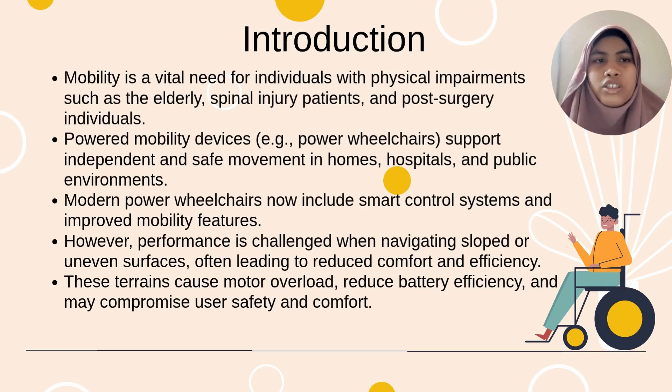Today we will be presenting an analysis on the performance of power wheelchair on inclined surfaces. Mobility is a fundamental need, especially for individuals with physical impairment, such as the elderly, patients with spinal cord injury, or those recovering from surgery. Power wheelchairs play a critical role in providing safe, stable, and independent transportation, whether at home, in hospital, or in public spaces. While modern design includes smart controls and improved mobility features, one of the key challenges still remains navigating slope or uneven surfaces. Such terrain places extra demand on the wheelchair motor, affecting both comfort and system performance.

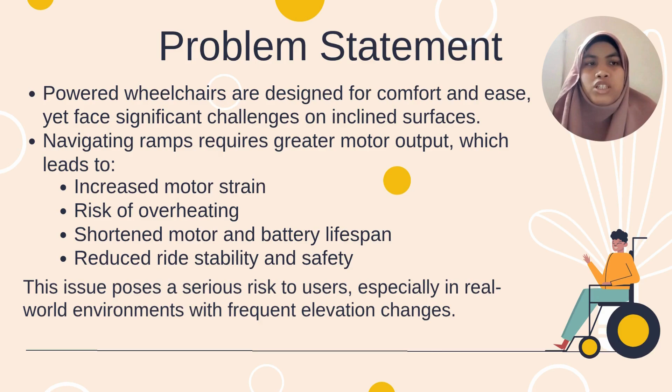Now, let's go into the core problem. Although power wheelchairs are built for comfort and efficiency, they tend to struggle significantly on ramp or inclined path. When climbing or descending slope, the motor is forced to output more power. This not only leads to motor strain and increased energy consumption, but also causes faster battery drain, possible overheating, and a general reduction in the lifespan of the system. In addition, users may experience jerky movement or instability, which can pose serious safety risks. Because this issue is so common in real-world environments, we believe it's critical to study and address this limitation.

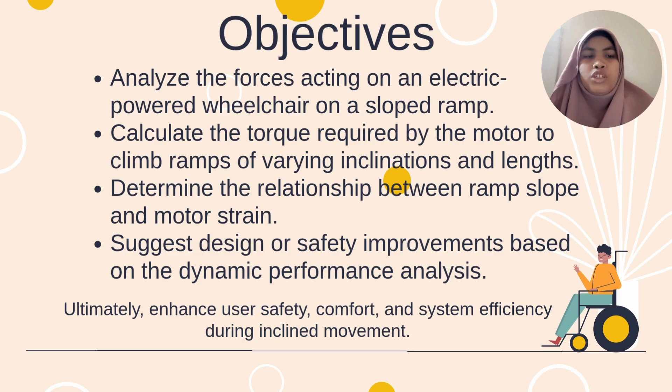With that in mind, here are the objectives of our study. First, we aim to analyze the forces acting on a power wheelchair as it moves on slope ramp. Next, we will calculate the torque required by the motor at different angles and ramp inclines. We also want to understand the relationship between slope and motor strain, as this can inform us about the mechanical limits and design gaps. From this analysis, we hope to propose improvements or safety measures to enhance user experience. Ultimately, our goal is to contribute to the development of power wheelchairs that are more efficient, durable, and safe for inclined travel.

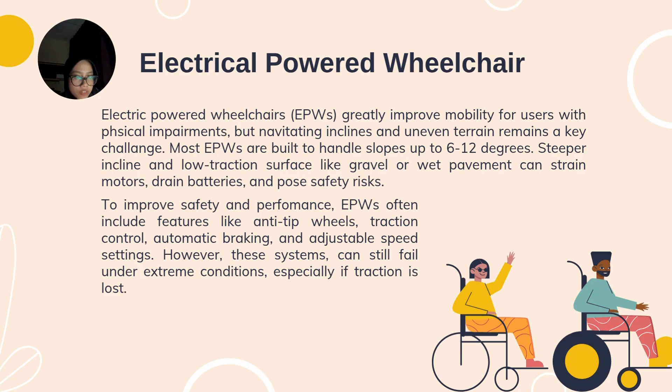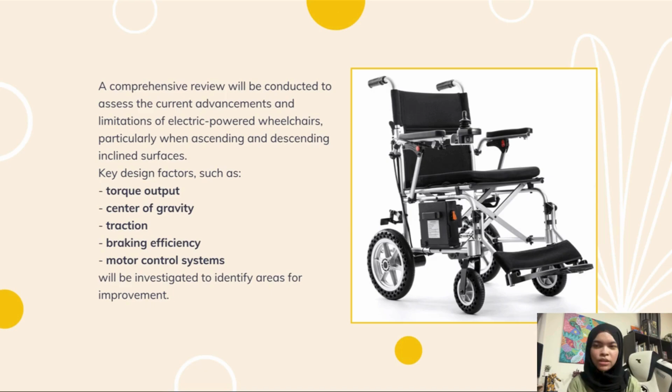I will be presenting a comprehensive review of the advancements and limitations of electric powered wheelchairs, with a special focus on their performance when navigating inclined surfaces. Our goal is to highlight key design factors including torque output, center of gravity, traction, braking efficiency, and motor control systems to identify areas for improvement. First, we start with forces in equilibrium.

When the wheelchair is stationary on a ramp, the gravitational component pulls it downslope. We analyze how this is balanced by the normal force and friction to ensure the wheelchair remains stable without unwanted rolling. Second, torque and rotational dynamics are critical.

We examine whether the motors can generate enough torque to climb inclines safely without overloading or causing sudden jerks that may destabilize the user. Next, the center of mass and stability analysis looks at how seat position and incline angle affect tipping risk. By adjusting the seat's position, we can optimize the center of gravity for maximum balance during both ascent and descent.

Fourth, we analyze load distribution and reaction forces on the front and rear wheels. This ensures the loads are balanced to prevent backward tipping when going uphill or nose diving forward when going downhill.

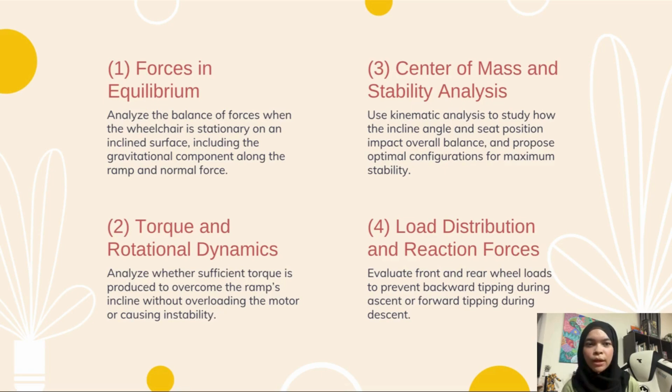Friction and traction are equally vital. We calculate the required coefficient of friction to maintain grip on different surfaces, especially when they are smooth or wet, to avoid dangerous slippage.

Braking dynamics and deceleration come next. We use dynamic principles to evaluate braking torque, stopping distance, and the risk of skidding or forward tipping during sudden stops on slopes. The moment of inertia and wheel acceleration are also considered.

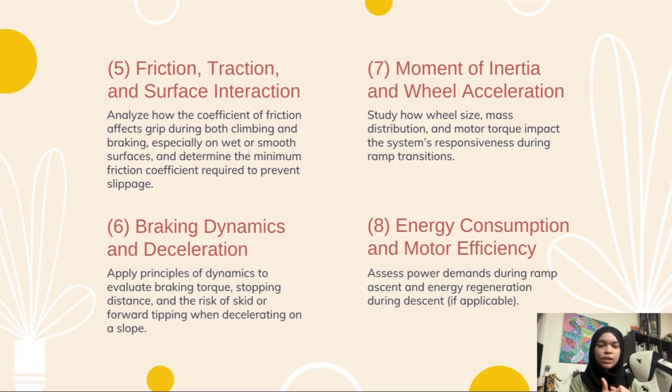We look at how wheel size and mass distribution impact how smoothly and safely the wheelchair can accelerate or decelerate during ramp transitions. Lastly, we assess energy consumption and motor efficiency, calculating the power needed to climb inclines and exploring whether energy can be regenerated during descent to extend battery life.

Okay, so now we will discuss the results or the calculations that we did based on the concepts that I discussed earlier during the methodology slide.

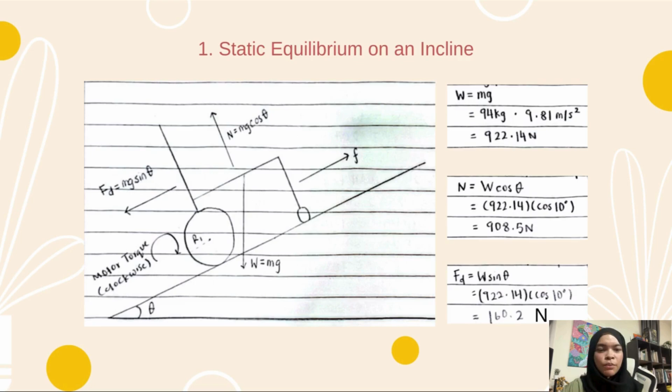First, we will discuss the calculation of static equilibrium on an incline. As you can see, I drew a free body diagram. Let's look at the forces when the wheelchair is stationary on a ramp. Imagine the wheelchair on a 10-degree incline. Gravity pulls it downward with a force of approximately 922 newtons. This force splits into two parts: a normal force of approximately 908.5 newtons pressing the wheelchair into the ramp, and a downhill force of approximately 160 newtons trying to make it slide down.

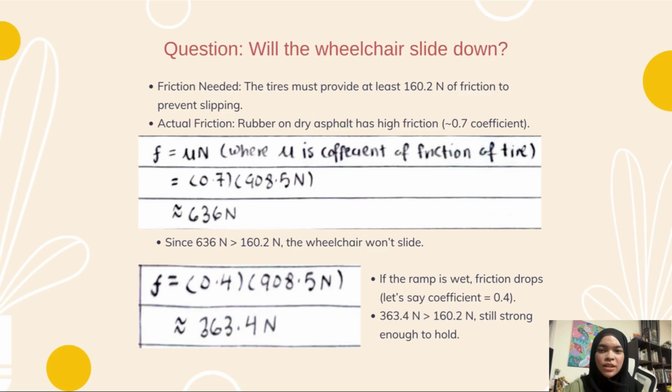So the question is, will it slide down? The rubber tires on dry asphalt provide up to 636 newtons of friction. Since we only need 160 newtons to hold the wheelchair, it stays put. But warning, on wet ramps the friction drops to 363 newtons, which is still safe for 10 degrees, but steeper ramps could be risky.

Now I will talk about the torque requirements for ascent, or the torque needed for the wheelchair to climb. For a 10-degree ramp, the downhill force is 160 newtons, and to accelerate at 0.5 meter per second squared, we need an extra 47 newtons. So the total force we need is 207 newtons.

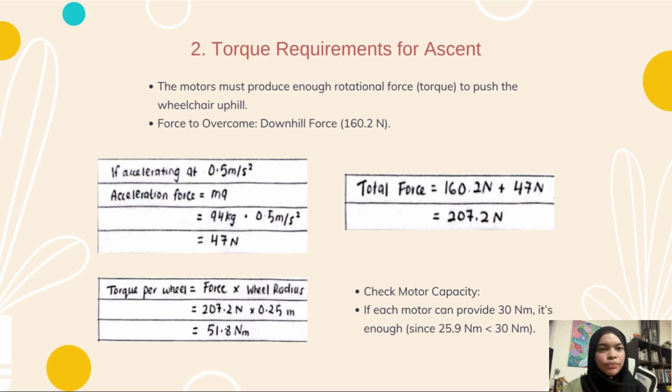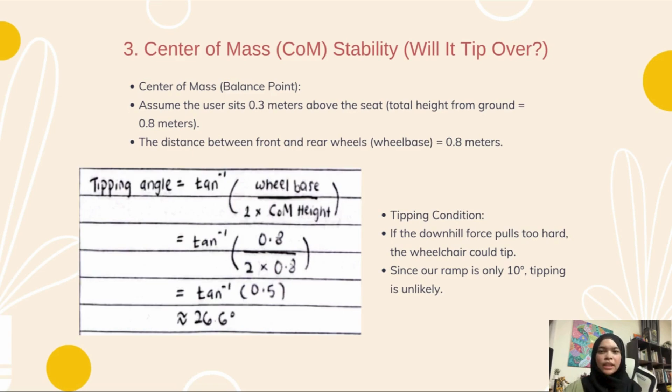Next, we will talk about stability, or the center of mass. Will the wheelchair tip over? That depends on the center of mass. Assuming the user's weight is centered 0.8 meters above the ground, the tipping angle is 26.6 degrees, far beyond our 10-degree ramp. So now, braking on descent.

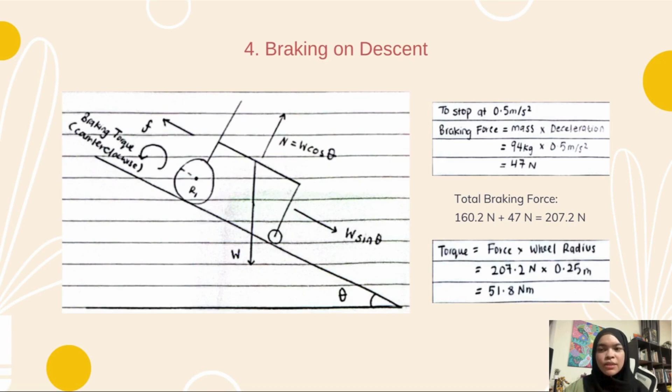Going downhill, brakes must counteract gravity. For a safe descent at 0.5 meter per second squared, with the downhill force of 160 newtons, the braking force might be 47 newtons, so the total braking needed must be 207 newtons. This requires 51.8 newton meters of braking torque. If the brakes can't deliver this, the wheelchair could speed up uncontrollably or tip forward.

Now the traction and friction limits. The minimum coefficient of friction to prevent slip is 0.18. Since our tires are made of rubber, we have a coefficient of 0.7, which is sufficient. But in wet conditions, that coefficient may drop down to 0.4, which is still safe for a 10-degree ramp.

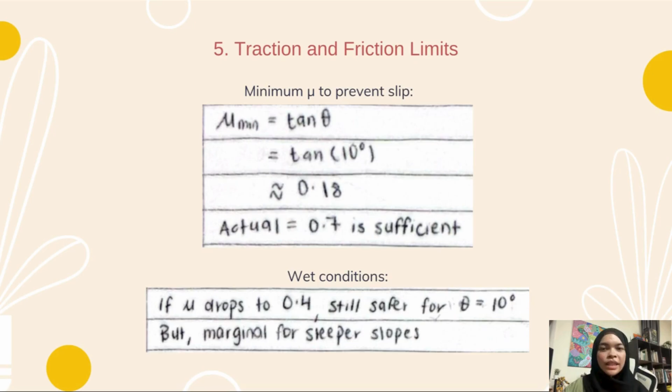So now the energy and battery life. Climbing ramps drains the battery fast at 207 watts of power. A 240 watt-hour battery like the EW6's lasts just 70 minutes of continuous climbing, based on my calculations.

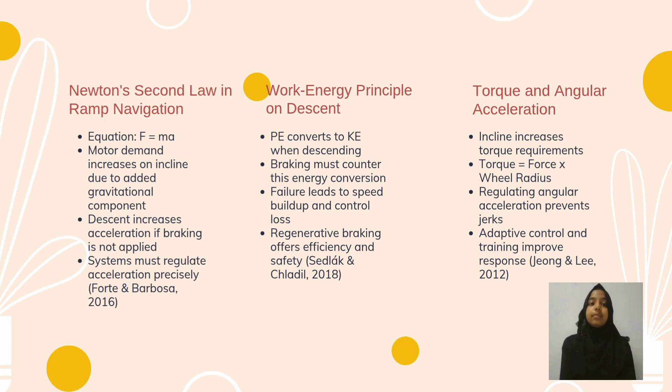Let's also look at momentum and impulse in braking. When descending, momentum increases. To stop safely, braking force must be applied over time to avoid skidding. Users with good core strength help absorb this force, but otherwise the braking system carries the full load.

We also have dynamic stability and equilibrium. Staying balanced while moving uphill or downhill requires maintaining dynamic equilibrium. A high center of gravity increases tipping risk. Features like anti-rollback wheels and adjustable seats can help stabilize the system.

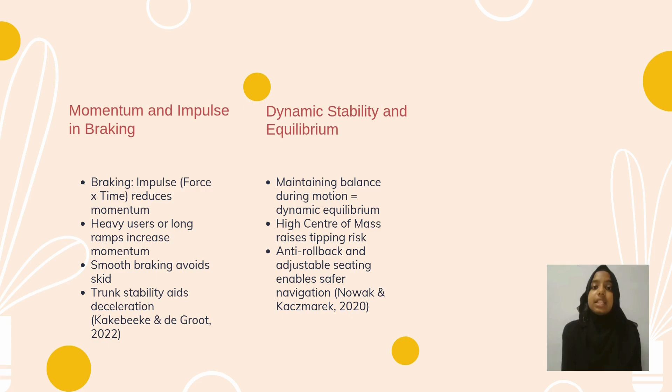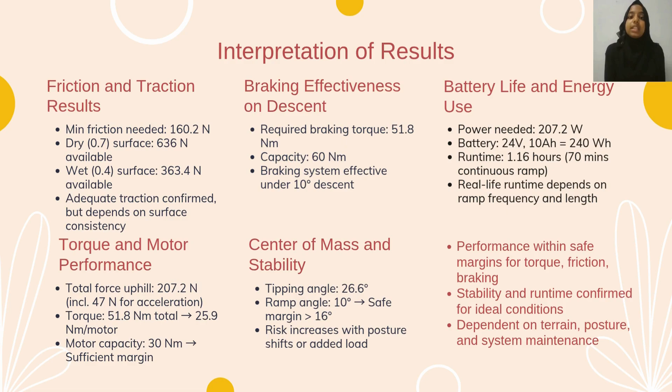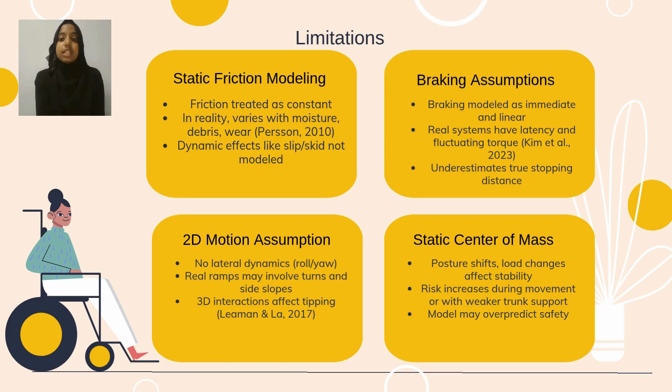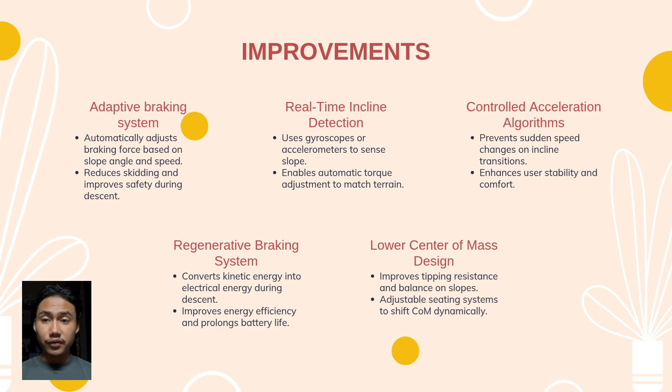So now, to ensure safer and more efficient powered wheelchair navigation on ramps, several key improvements can be made. First and foremost, the adoption of adaptive braking systems is crucial. These systems can automatically adjust the braking force based on slope, angle, and speed, reducing the risk of skidding and ensuring smooth deceleration during descents.

Next, we suggest implementing real-time incline detection using sensors like gyroscopes and accelerometers. This allows the motor to instantly adjust the torque output based on the slope, improving performance and safety on changing terrain. We also propose controlled acceleration algorithms that prevent abrupt speed surges during ramp transitions, which minimize tipping risk and enhance user comfort, especially for elderly users.

Next, in terms of energy efficiency, regenerative braking should be introduced. These systems capture kinetic energy during descent and convert it into usable electricity, extending battery life and reducing motor strain. And lastly, for structural design, a lower center of mass should be prioritized. Adjustable seat systems can dynamically shift the user's center of gravity to prevent tipping.

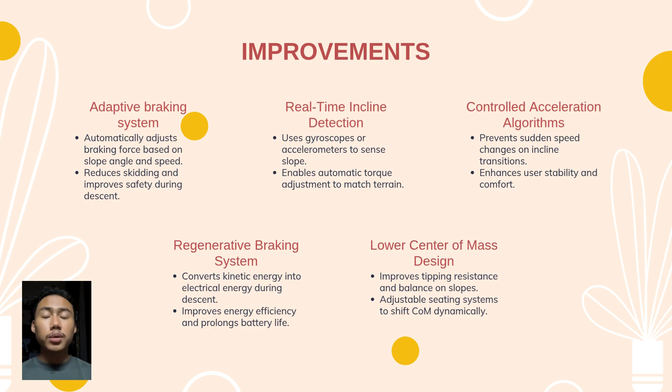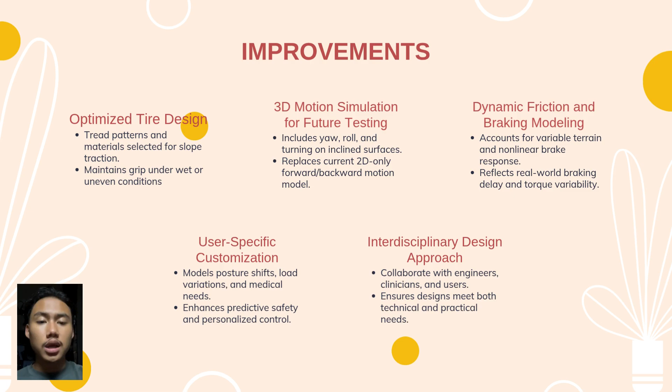Moreover, user-specific customization like posture, load variability, and body characteristics should be included in future designs for better personalized safety and control. Lastly, a collaborative interdisciplinary approach involving engineers, medical professionals, and users themselves will ensure the design improvements are not only technically sound but also practical and user friendly.

To conclude, while powered wheelchairs perform safely under controlled ramp conditions, they still face dynamic challenges that flat surfaces don't present. Key factors like torque output, braking strength, and energy efficiency must be carefully tuned to handle slopes effectively. Our study shows that under normal conditions, these systems operate within safe limits.

However, for future improvements, it's essential that wheelchair designs include real-time control systems, adaptive braking, and better energy management. This enhancement will ensure safer, more reliable mobility for users in diverse environments.